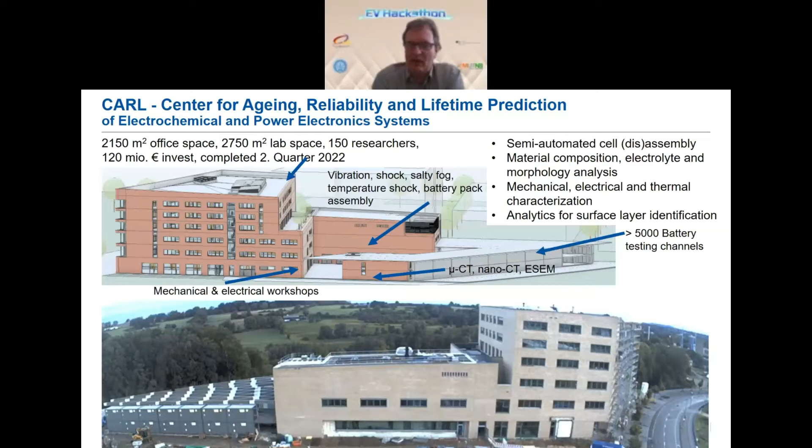Just to show our main challenge right now: these days we are moving to our new research center with a total of 5,000 square meters of lab space and office space, where we can look into batteries on one side really on a nanometer scale with electron microscopes and computer tomographs, and on the other hand we have temperature chambers where we can test full cars if we want to. We have both batteries and power electronics together. These are just impressions - we're in the phase of moving into this building, and by the end of this month this will mainly be finished as far as it looks right now.

I want to make you aware that our work is not only purely for the academic side. We always work very closely with companies, but we also have founded companies. There are 4 successful spin-off companies working these days around our university group, and they have in total more than 120, 130 full-time employees. This is very interesting because lots of the people who finish their work at our institute can continue working there.

So now let me look into the topic. It is simply called electromobility in Germany. For sure Germany is not on its own, so I will look at some numbers regarding the European Union or also the world. But let me look into this first, also letting you know the boundary conditions. The most important thing is that Germany has decided to be net zero emission-free in the year 2045. The European Union has a target of 2050.

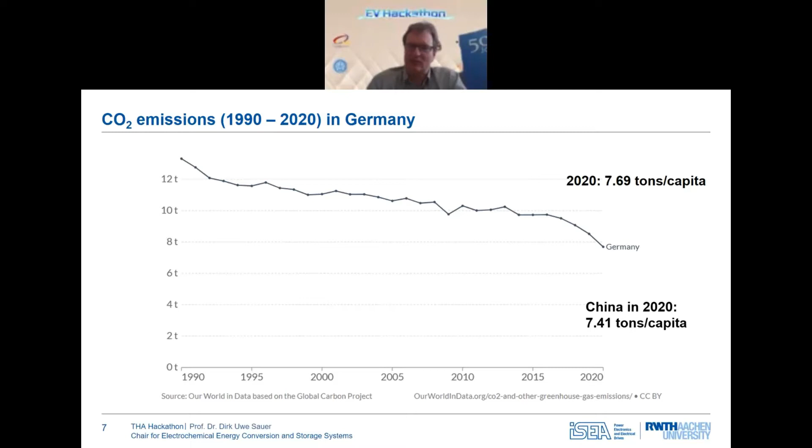We still have a huge emission of CO2. It dropped somehow from 1990 to 2020, but it is still something like more than 7 point, almost 7.7 tons of CO2 per capita. As a comparison, China currently has about 7.4 tons per capita. So while at least our emissions went down to a certain amount, in China it is still going up, because the level of industrialization is still increasing. But this is a challenge we are dealing with in the world - we overall still have increasing emissions.

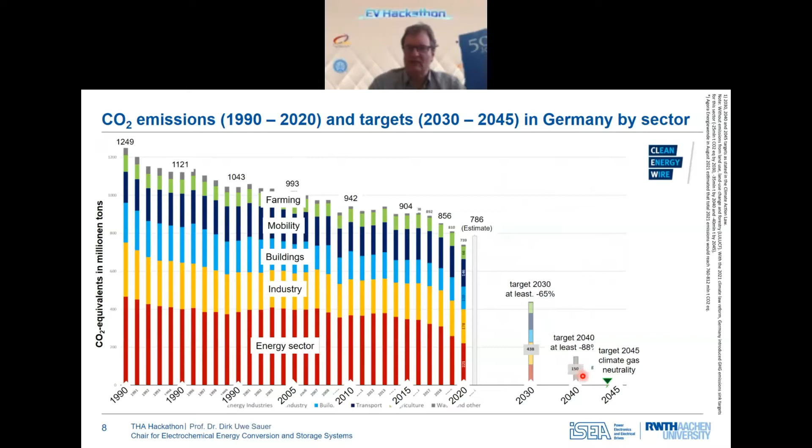But you also can see how strong the emissions have to go down from today towards 2030. So in 2021, we had approximately 786 million tons of CO2, and this should go down to 438 in 2030, down to 150 ten years later, and as mentioned, to zero in 2045.

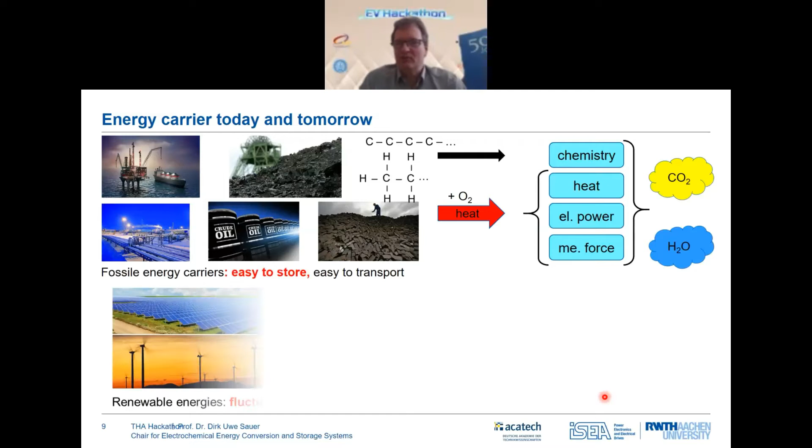So to get CO2 free, we have to change our energy system really dramatically. Today, we have a fossil-fueled energy world, all of us in the world, based on gas, coal, and oil, mainly, with some nuclear fuels in some countries in addition. And these fuels are typically all burned. So we make heat, and from the heat we can make steam for power generation in power plants. We may do combustion in combustion engines, or heat for whatever. But it is mainly using the fossil fuels to burn them.

And this will be very different in the future. In the future, we will have mainly electricity as the primary energy source. Wind and PV systems will dominate our energy supplies. Some additional sources, okay, but dominating will be wind and photovoltaics. And they produce power, first of all. Electrical power is the energy with the highest value. We can do everything from electrical power: mechanical force, light, communication, whatever is needed. And this is the reason why we are thinking about electromobility, because we want to make use of this source of electricity at the highest possible efficiency.

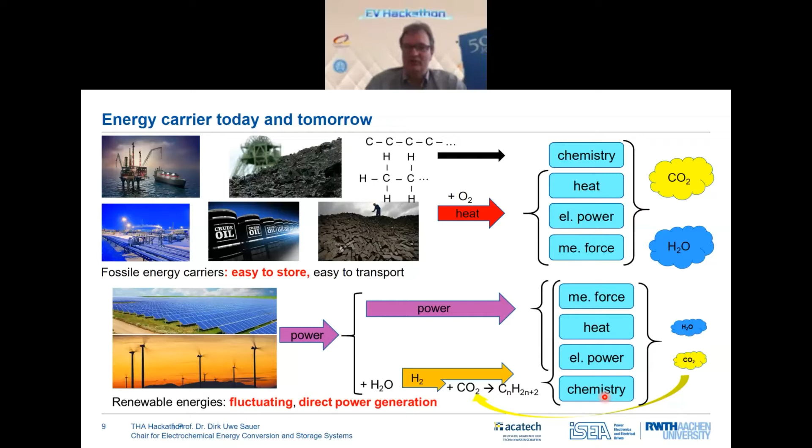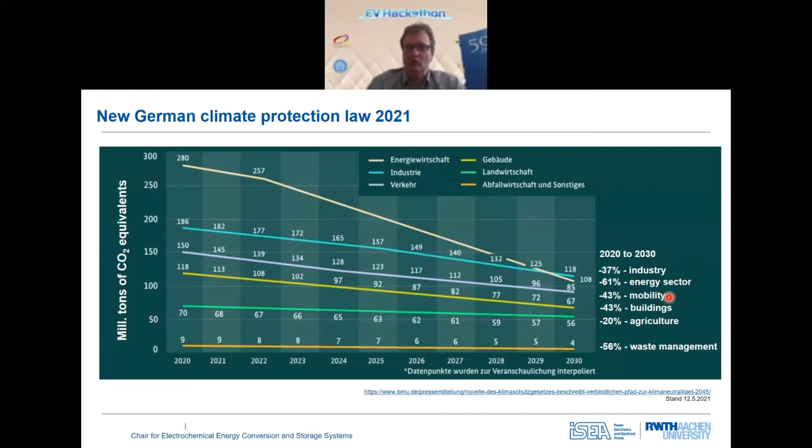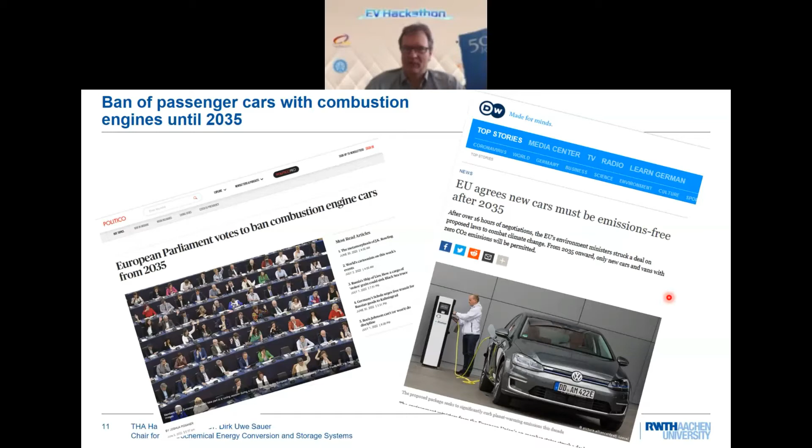Now, the European Commission is just in the process—and processes in the European Commission or European Union are very complex and take a long while. But meanwhile, it is quite clear that our Parliament, the European Parliament, as well as our national governments, have decided that combustion engine cars are more or less completely banned from 2035 with regard to newly sold cars. So if you still have a combustion engine car, you're allowed to use it further, no question. But new registrations of combustion engine cars will be banned in the European Union, at the latest from 2035 onwards. There's just 13 years to go.

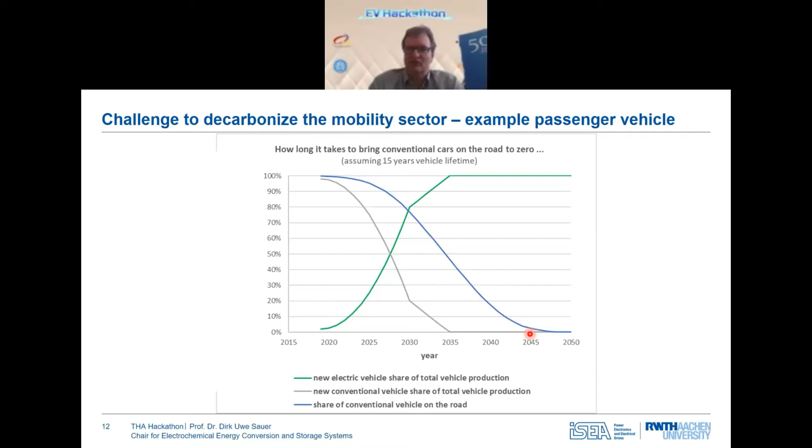Beside this, and I would like to make you aware of this, even though you're probably quite a bit away from Europe at the moment, we have several challenges in the European energy market these days.

First of all, we implemented a CO2 trading mechanism more than 10 years ago. But for a long while, the cost for a ton of CO2 was very low, sometimes as low as 5 euros per ton. Even in 2020, it was on average maybe 25 euros per ton CO2. Whereas in the last part of 2021 and now in 2022, we have achieved 80 to 90 euros per ton CO2. This has an impact on power price.

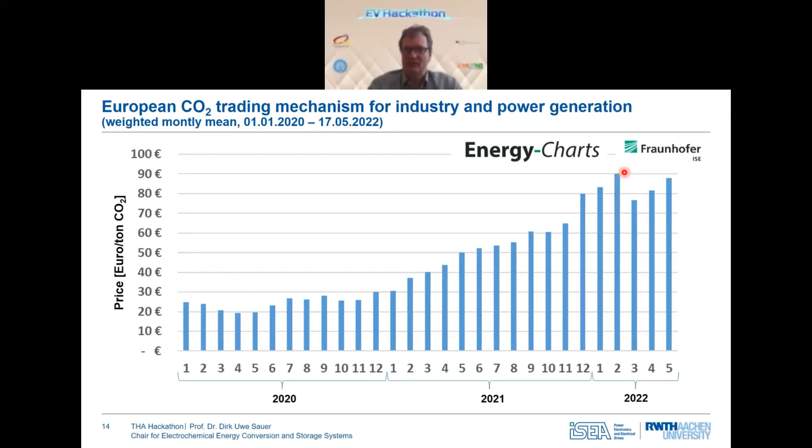For example, we produce maybe 20% of our electricity from lignite, brown coal, which is the only energy resource we have naturally in Germany on our own. The production cost of power from lignite is about 3 cents per kilowatt hour. Now, having 90 euros per ton CO2 adds another 10 cents just for the CO2. So the price for power from a lignite power plant increased from 3 cents to 13 cents, which is a tremendous increase. And beside this, even more severe, is the problem with the exploding cost for natural gas.

The prices for natural gas started to increase already in the second half of 2021 and then got to a next maximum when the Russian aggressive war on Ukraine started this year. Europe gets about one third of its energy in coal, oil, and gas from Russia. But due to the embargoes on one side, and because Russia is now turning off the gas supply via pipelines to a very large extent, we suffer from under supply of energy, especially gas.

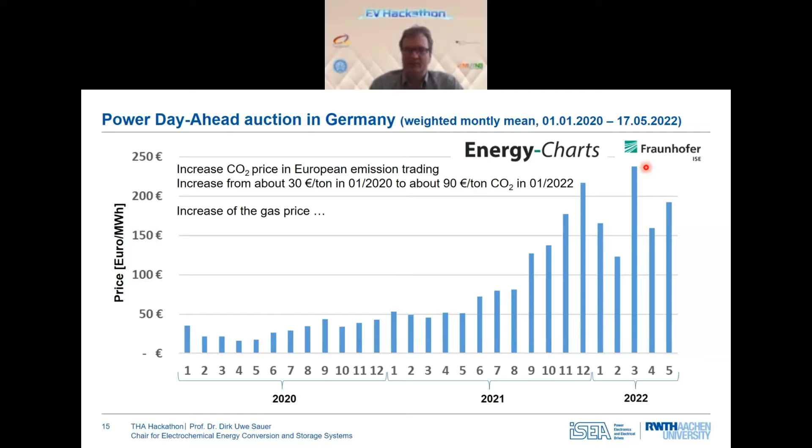This increases the power production cost dramatically, because most of the time the gas power plants set the price for all the other power plants, and the gas price further increases. It was in the past something like 10 to 20 euros per megawatt hour. But meanwhile, the futures for 2023 are traded at 90 euros per megawatt hour, a factor of at least 4.5 times more than a year ago. And even for 2025, traders expect prices in the range of 60 euros per megawatt hour in gas.

This affects our power industry a lot, and the prices for end users will dramatically increase. It also affects industry very much, because industry relies heavily on the use of gas.

In addition, we see another problem in Europe because France, which typically supplies itself with 80% electricity from nuclear power plants, has shut down more than half of their nuclear power plants at this point in time due to plant revisions, but also due to unexpected failures with corrosion in critical systems. Therefore, France during the summer and probably also during the coming winter has significantly reduced power production, and needs to be served in addition, especially from Germany, which requires additional coal and gas power generation.

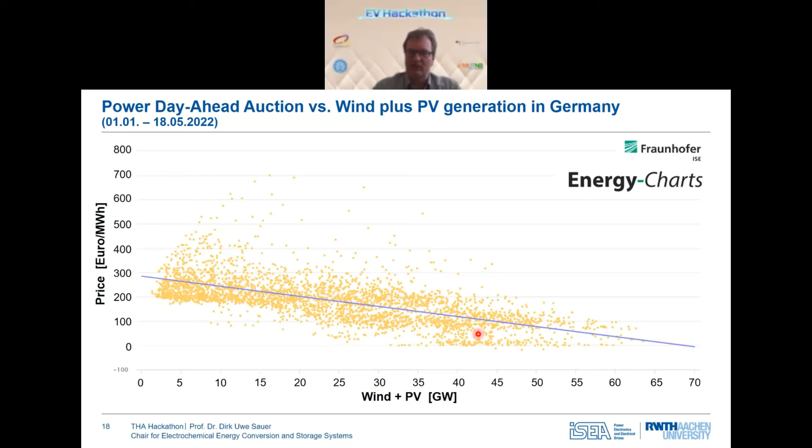So the renewables, or the change to renewables, the Energiewende, is not the root cause for our price problems. The renewables are the solution. We now have to go much faster than in the past.

However, we're now producing green electricity, CO2-free electricity. The question is what to do with this, because we have to serve our energy system, but mainly we want to reduce emissions. Now we can calculate how much CO2 emissions we can save if we use one kilowatt hour from green power generation.

If we use electricity to drive a battery electric vehicle instead of an internal combustion engine with petrol, then we can still save something like 670 grams of CO2.

If we would use fuel cell cars, producing hydrogen first from this green electricity, then bringing it into the car and reconverting it to electricity in a fuel cell, then we only can save 260 grams of CO2.

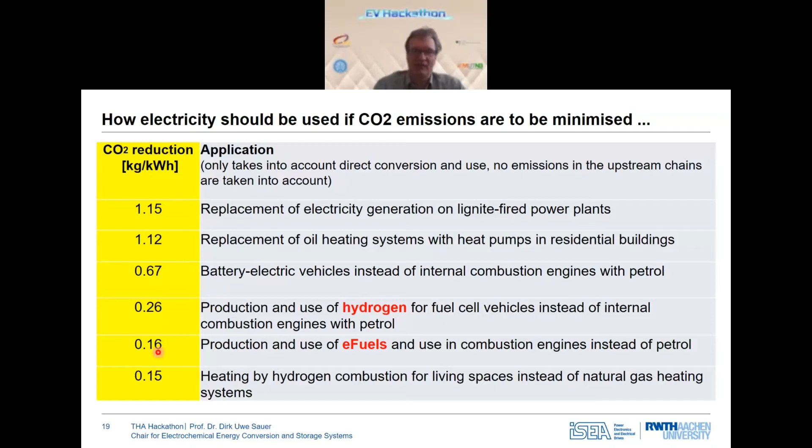Then we have losses in the power grid and the charger. During discharging, we have some losses, and we have losses in the power converters and electrical machine. But overall, about 74% of the energy we provide from renewables can be used in the vehicle.

If we go for fuel cell electric vehicles, we have to produce hydrogen at a certain efficiency, compress the hydrogen, and we have a limited efficiency in the fuel cell. Again, we have the inverter and the electrical machine. But as you can see, the overall efficiency is only roughly one third—3 kilowatt hours needed as input and only 1 kilowatt hour output.

It's getting worse if we go for these e-fuels or synthetic fuels, because it requires not only producing hydrogen, it also requires capturing CO2 from the air. It requires a chemical process to produce the liquid hydrocarbons, which then also need to be transported. The combustion engine has maybe an average efficiency of 30% in passenger vehicles, meaning the overall efficiency is maybe only 14%. Some say it is even lower.

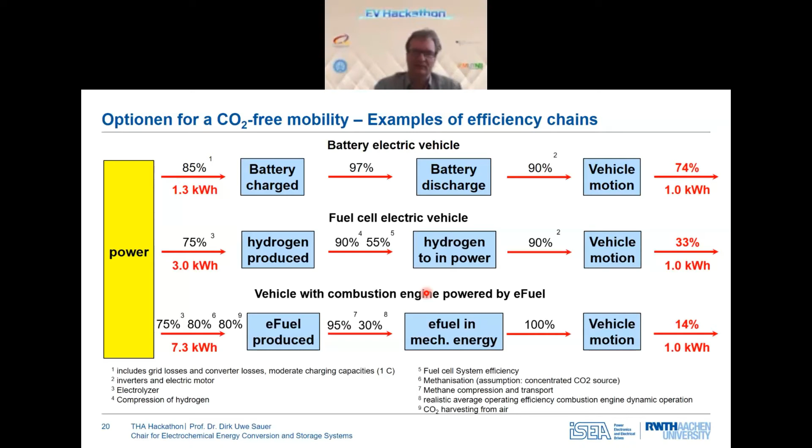So some aspects on mobility. First of all, the design of electric vehicles has really changed a lot in the last years. We had the first generation of electric vehicles from the main, traditional car manufacturers, which were launched roughly between 2012 and 2018.

What we see these days, introduced from the very beginning by Tesla but meanwhile adopted by more or less all car manufacturers, is what we call the skateboard design. We have in the ground floor of the car a battery with a height of only 12 to 15 centimeters, and there is plenty of space for the battery, with driving ranges in the order of 300 to 500 kilometers. Then we have power electronics and electric motors, either centralized on the rear or front axis, or directly in the wheels, depending on the specific concept. You can see immediately the very different types of design, and what we have as a modern drivetrain.

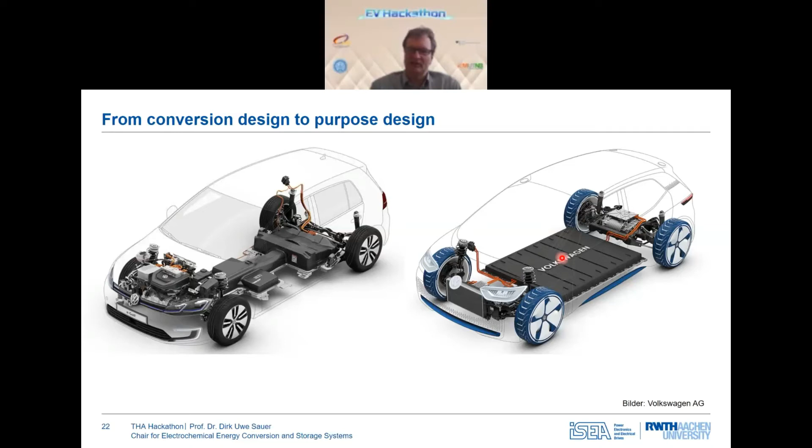This is the same, just from a different perspective. You may have a look into this when you look at the slides once again. There's not much new here in this slide, it just gives you another view on the electric components and the battery system.

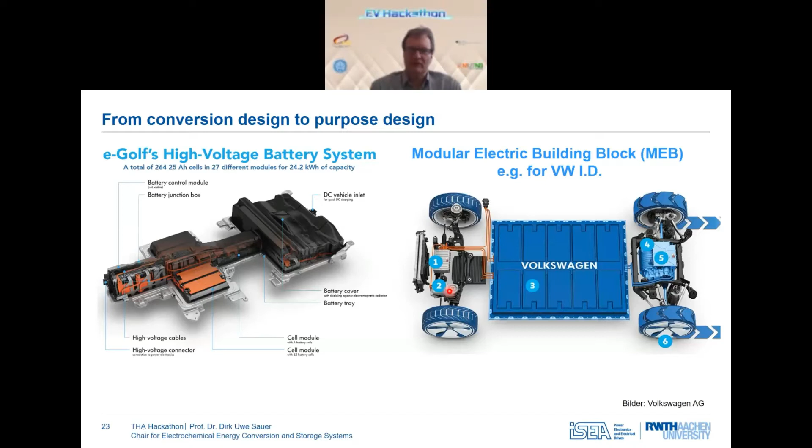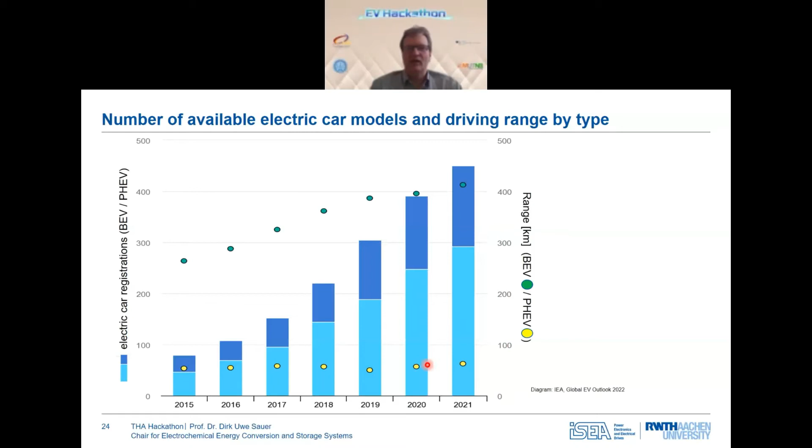And about two-thirds of these are full electric cars, and one-third are plug-in hybrid electric vehicles. We also can see in this diagram, which refers to the right scale, the typical range of these cars - for the plug-in hybrids in yellow and for the full electric vehicles in green.

I have this curve on this diagram already starting in 2010 once again. And you can see, while the first full electric vehicles had driving ranges on the order of 120 to 150 kilometers, it is meanwhile, on average, 350.

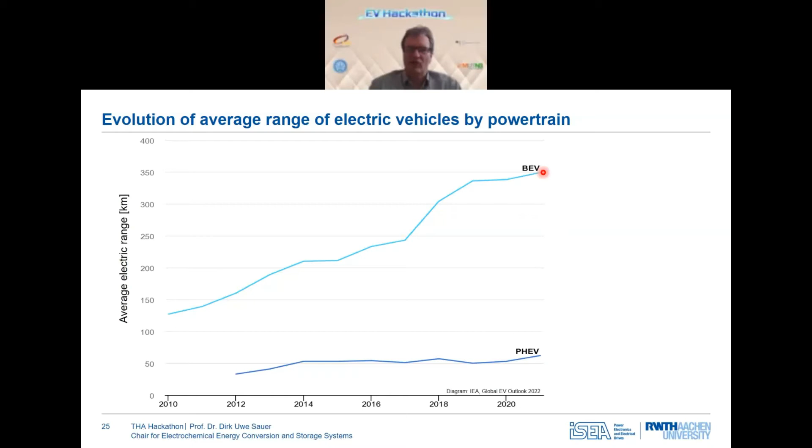The plug-in hybrids, which have a combustion engine for long distance driving, still have driving ranges in the order of 50 to 60 kilometers from the battery. This is sufficient for most driving purposes, but not if you want to go long distances, and the plug-in hybrids still have a combustion engine and use fossil fuel, at least on the longer distances.

But this tremendous increase in driving range at still decreasing prices, by the way, is the most important factor that battery electric vehicles are meanwhile also a real success in the international automotive markets.

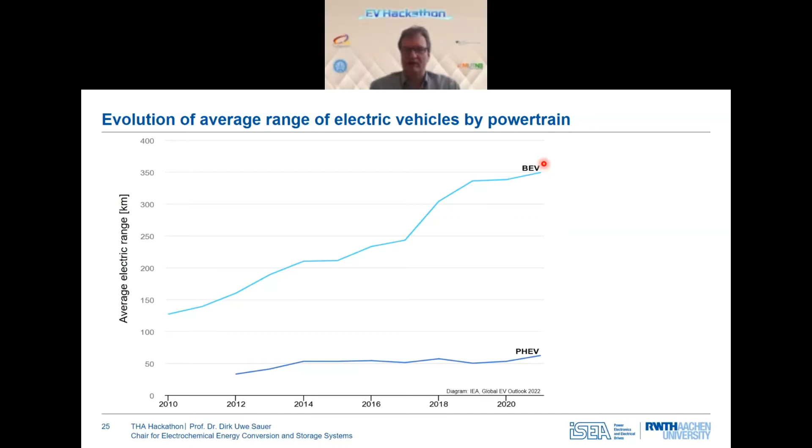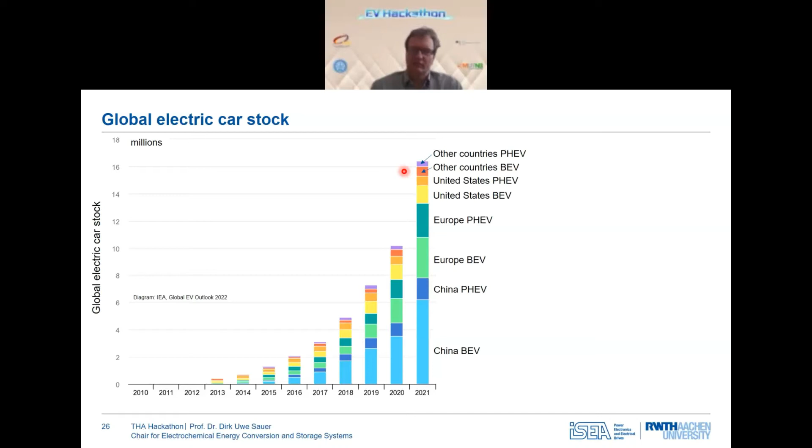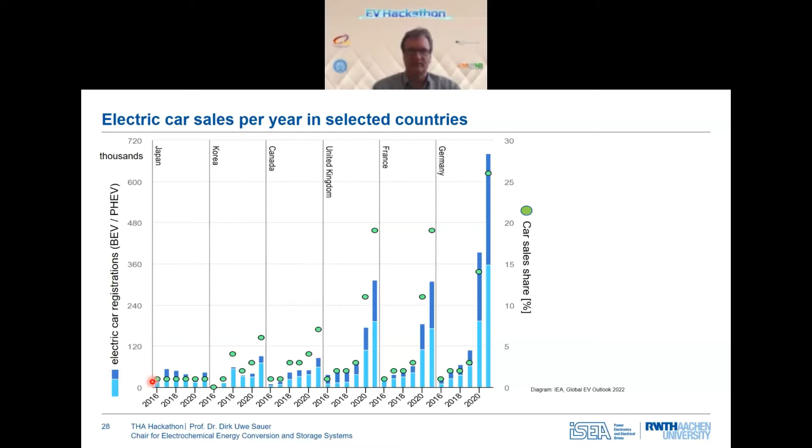So these are the numbers, just in a different way to represent them. I just want to point out that these are always the numbers for the newly registered cars in the specific years, and that the number of sold cars is really increasing a lot. As I said, by 2030 it should reach up to 80% share, and already 5 years later should achieve 100%.

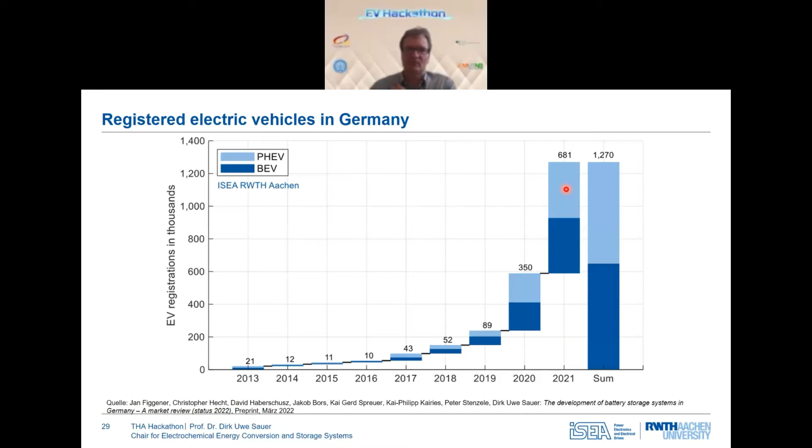This will require huge capacities in batteries. We expect that the worldwide market for batteries in electric vehicles will be about 1,000 gigawatt hours per year, somehow among 2025 and 2027. Just as an example, about 2013, Tesla announced to build a gigafactory for battery production, and the announced capacity at this point in time was 30 gigawatt hours per year.

And this equaled, at this point in time, the whole battery production in lithium-ion batteries worldwide. Now we are talking not about 30, but 30 times more than this - 1,000 gigawatt hours. Just Volkswagen intends to build in Europe 6 factories with 40 gigawatt hours per year each, so Volkswagen wants to get to a production capacity in batteries in 2030 of 240 gigawatt hours just for Europe. The overall market in 2030 is expected to be about 3,000 gigawatt hours battery capacity for the mobility sector.

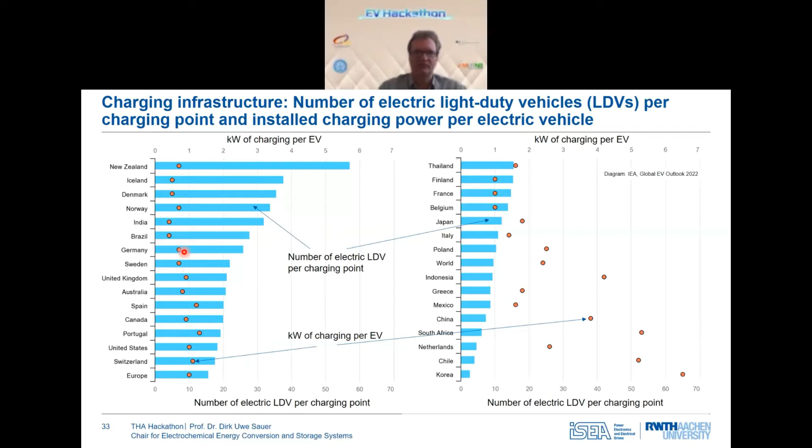What is interesting is that these electric vehicles also drive around with huge battery capacities, and most part of the day these batteries are just standing around. A car is driving only 1 to 2 hours on average in the European or in the United States market, so 22 hours a day this battery capacity would be available also for doing grid services.

When we look into the German market, just by the end of 2021, we had in electric vehicles about 40 gigawatt hours of battery capacity. This was only 2.5% of the vehicles being electric of the overall stock, but this already equaled 40 gigawatt hours. The number is interesting because all our pumped hydropower stations in Germany, which are responsible for balancing the grid and grid stability, also have a capacity of 40 gigawatt hours. So in very few years, we have brought a capacity equaling the total pumped hydropower station capacity onto the road by electric vehicles.

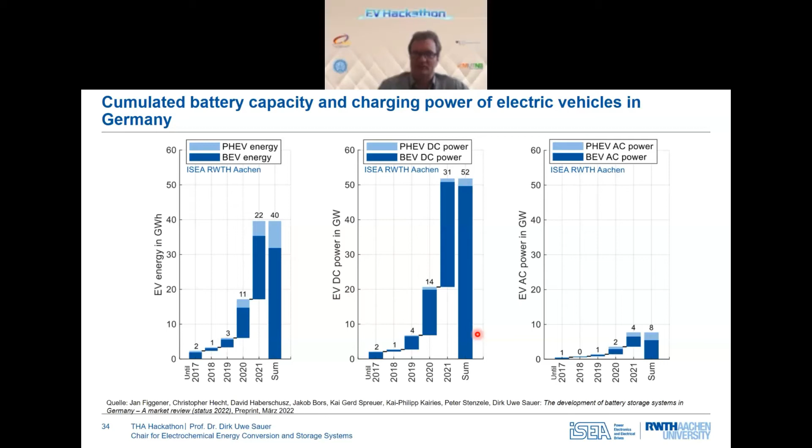And this is what makes it so interesting, thinking of the battery capacity from the cars via vehicle-to-grid concepts. By the way, Volkswagen has started this year to equip all new full electric vehicles with a bidirectional charger. This is the first and important step toward full grid service capacity from electric vehicles, because these bidirectional chargers allow us not only to charge the battery, but also to feed electricity back into the grid.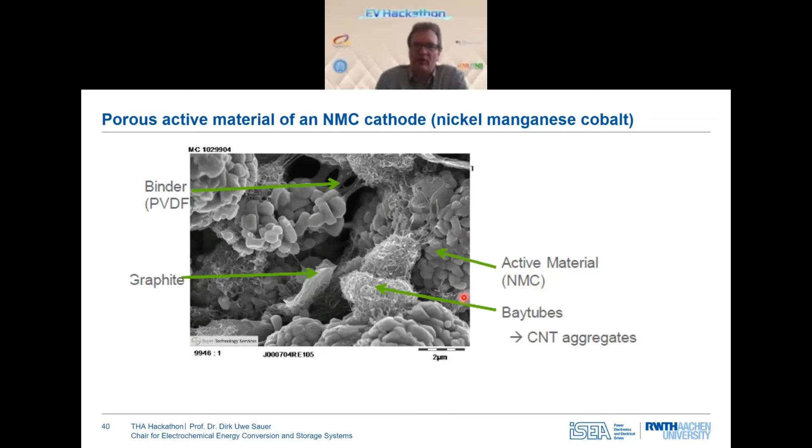Very small particles, for example, give lots of surface and therefore higher rates in charging or discharging. But unfortunately, also the main aging processes take part on these surfaces. So the higher the surface, the faster the battery ages. So, as in many other cases, finding the right composition is a question of compromises among different features, such as charging or discharging rates on the one hand, or lifetime and aging on the other hand.

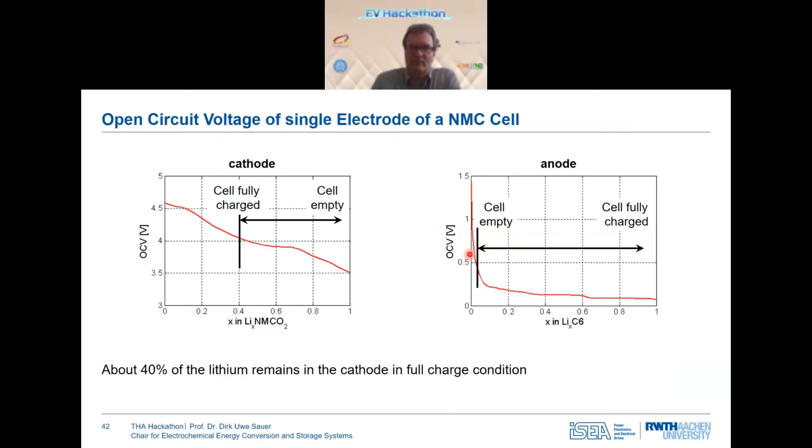Just to give you a few of the different combinations used these days, we again have the graphite on the right-hand side and the cathode on the left-hand side. Today, commercially, you can get NMC batteries - nickel, manganese, cobalt. NCA is nickel, cobalt, aluminium, and LMO is lithium manganese oxide. These are common abbreviations, and sometimes you can read on the nameplate or in the data sheet which chemistry is used.

But we also have found a lot of batteries where the reality inside the battery does not equal what is in the data sheet or on the nameplate. We can analyze this in our lab in detail, and we were surprised in several cases by what we found compared with what was on the nameplate.

Another quite popular material is lithium iron phosphate, LFP, which is another version for the cathode material. But please be aware that the anode, the graphite anode, still remains the same. And the anode is mainly responsible for the lifetime. Therefore, if you just keep the graphite in the same amount as with an NMC battery, you will not get more lifetime with an LFP battery.

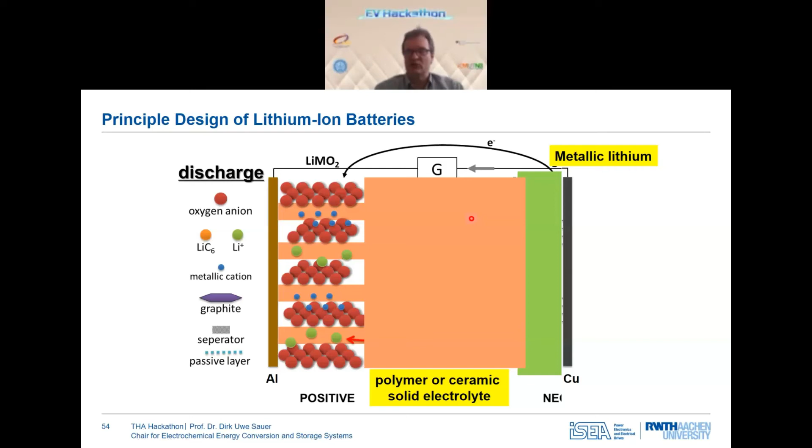What is more interesting, and not listed on these slides, is that battery manufacturers, especially the largest one, CATL from China, have announced to come up with sodium-based batteries. In a first approximation, lithium is replaced by sodium, and sodium is much cheaper than lithium, therefore an interesting replacement material. But we will see what the performance of these batteries is. We expect energy densities, for example, in the range of LFP, so 25 to 30% lower than NMC batteries. But for medium type cars and those with ranges maybe up to 350 kilometers, not 500 or more, the LFP and sodium-based batteries could be sufficient.

So then I would like to have a short look into the fuel cell electric vehicle market. I mentioned already that the efficiency is much lower, and so are also the number of registered vehicles worldwide.

Remember when we looked into the number of registrations of full electric vehicles, which account meanwhile to more than 16 million, Korea and Japan were very low. So they still dream the dream of fuel cell cars, and therefore they did not go in the same way into battery electric vehicles like China, Europe, or the United States.

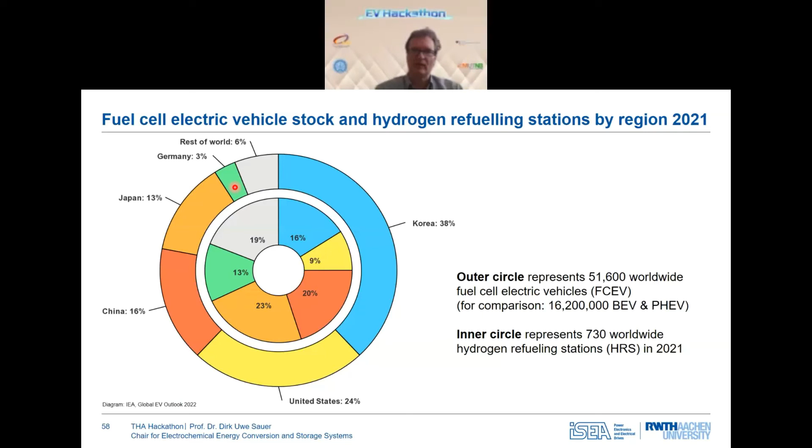So these are just quite similar numbers. However, here now we have the vehicle stock by region in 2021, once again with Korea, United States, and Japan dominating.

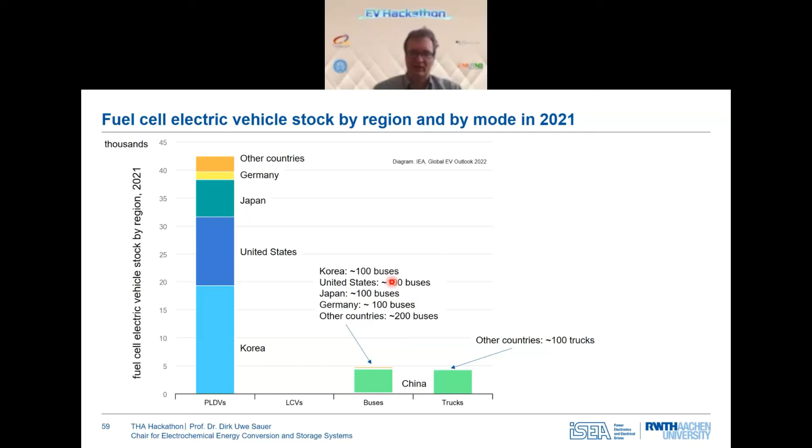But it is different if we look to buses and trucks. China has about 4,500 fuel cell buses, but I think several hundred thousand full electric, battery electric buses, and trucks another 4,000 or so. You can see only 100 trucks are in all the other countries of the world, and for buses, at least we have about 100 in Korea, United States, Japan, Germany, and other countries. But these are more for testing purposes rather than really of relevance for public transport.

I also would like to discuss what could be beyond, or how could we drive our trucks, especially heavy trucks, 40 tons or more. There we have 4 different concepts, and it is not really clear yet where we will end up.

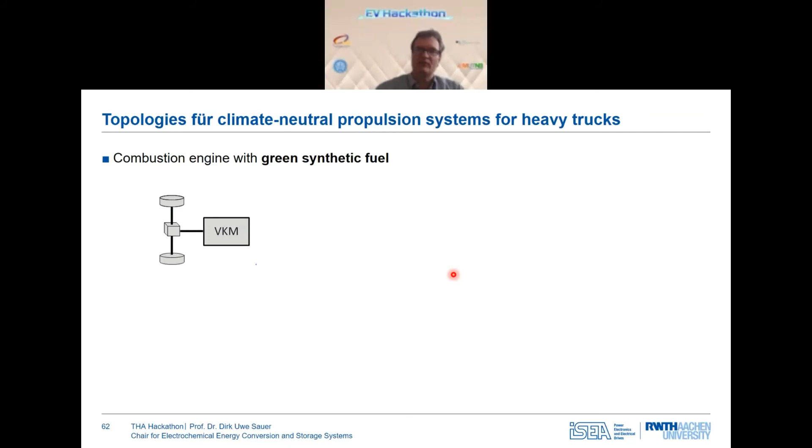There is one option to use synthetic fuels, but you remember the efficiency in producing synthetic fuels is very low, and therefore I hardly find truck manufacturers who really rely on green synthetic fuels, because the fuels would be much too expensive due to the low efficiency compared with other options. The next option is with fuel cells. I showed you there are about 4,500 trucks worldwide, which is still negligible for sure, but for testing purposes, having hydrogen as a main source of energy could give them maybe one day of driving with hydrogen.

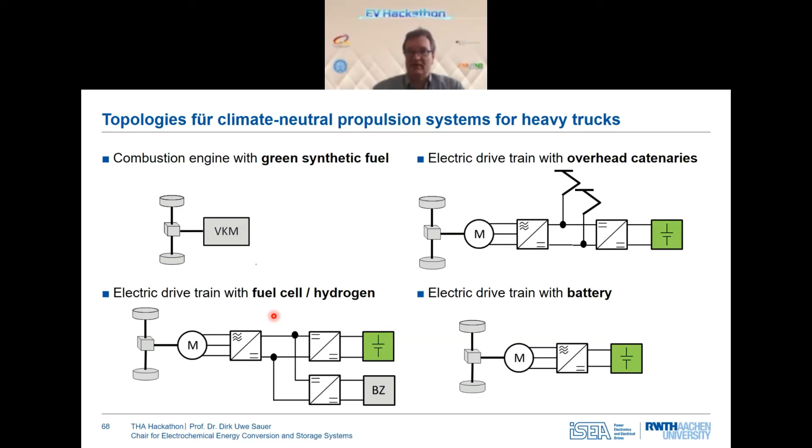And this is okay. The batteries for sure are heavy, maybe 5 or 6 tons, but 90% of the trucks on European highways are not limited by weight in their cargo, but by volume. So the cargo space is simply full in volume, and only less than 10% of the trucks are limited by weight. So the majority of trucks could easily afford the additional 5 tons of batteries, and they could go with this.

And this is a real fight. We have in Germany two world-leading truck manufacturers. One is Daimler, with many companies belonging to them in Japan, the United States, and other countries—the largest truck manufacturer in the world. They still say the long-haul heavy trucks will go on fuel cells, but they also develop battery electric vehicles. This is what we know.

The other one, called MAN, is also a large truck manufacturer, and they decided already many years ago that they will go purely on battery electric trucks. The reason is, on the one hand, hydrogen as a fuel will be much more expensive than electricity in the long run. And they also say that infrastructure, for example in African countries, is much easier to build up with electric chargers rather than with hydrogen filling stations.

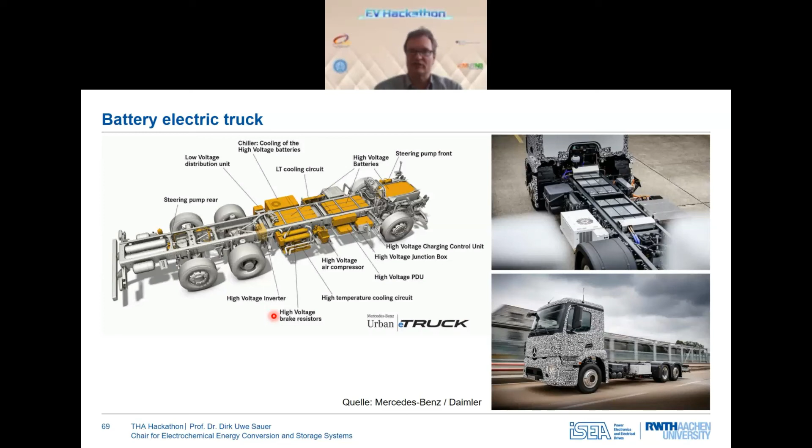So summing up, I tried to show you that currently we have very high electricity prices in Europe, which is for sure not very good for introducing electric vehicles. But we plan to increase the share of renewables in power production until 2030 to 80%, alongside, by the way, a 20% increase in power consumption. So we need more electricity for mobility, for space heating, and so on—electricity consumption is not expected to go down anymore.

The market for electric vehicles is really growing fast. Dominating are the markets in China and in Europe, followed by the United States to a smaller extent. Other countries in the rest of the world are significantly below.

Germany would like to terminate the sales of combustion engine passenger cars by 2035. Combustion engines may still be there for farming machines or construction machines. Also, trucks—heavy trucks—are not included in this. Light-duty trucks, yes, but they go to battery electric anyway for different reasons. Lithium-ion batteries and all their derivatives rule the battery world and will do so for a long while. For passenger vehicles, we don't see any alternative to battery electric vehicles in the future.

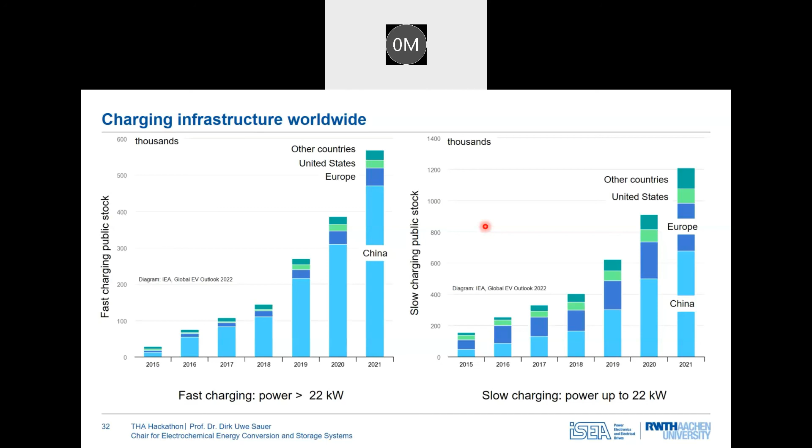Therefore, the number of fast chargers is maybe relatively small, but the power rating is very high, because it is expected that these public chargers are mainly needed when you go on highways. Today, the majority of people who buy electric cars have houses of their own, so they have their own garage, and therefore a non-public slow charger at home anyway. So they will mainly use the chargers at home or the fast chargers on the highway.

Whereas if you look at China, at the mega cities with huge numbers of skyscrapers, most people live in apartments and do not necessarily have their own garage - they park their car somewhere. They need public chargers also for their day-to-day charging. In Germany, day-to-day charging is not on public chargers, it is at home. But this is different in China.